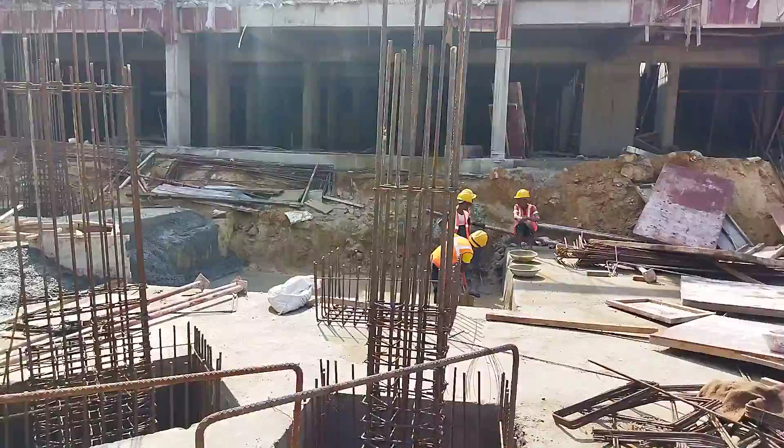Hi guys, the area we have shown is a clubhouse, and now we are going to explain about combined footing reinforcement as per the drawing. Meet Shiva Shankar, senior site engineer of this area. Now he will talk about the drawing.

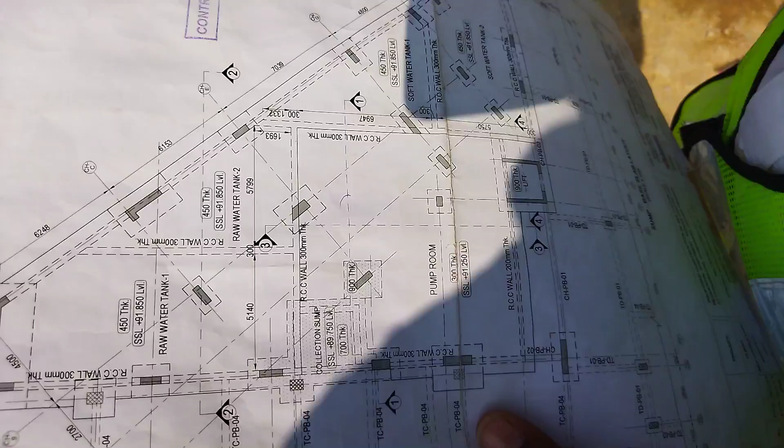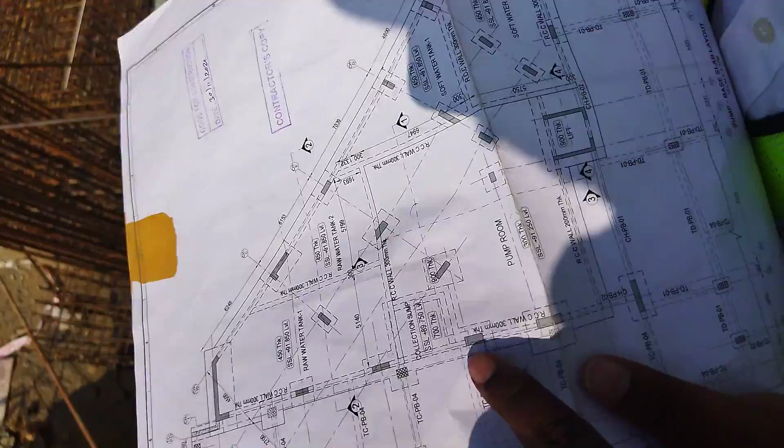The drawing which we are seeing in the video is called a pump room. This part is a collection sump, and now we are doing the reinforcement of the collection sump. Now we are going to open the reinforcement details and the section. See here, section 1. In this detail, it is section 1. So now we are opening section 1 of this drawing, another drawing.

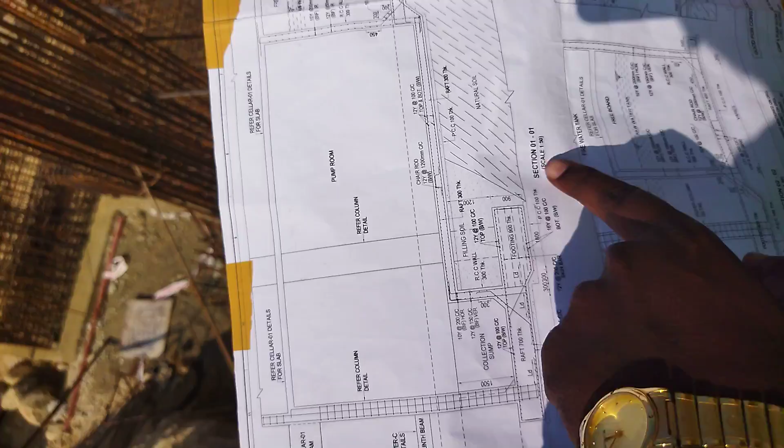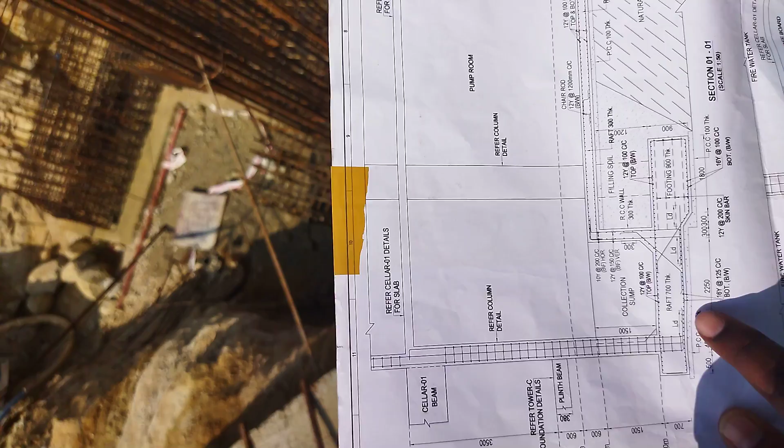Here it is section 1-1. In section 1-1, we are getting an RCC wall and collection sump, then the raft. The raft thickness is 700, and the reinforcement details. Now we are getting the reinforcement details. Here the top is 12 mm dia, and the bottom also 16 mm dia with 125 center to center.

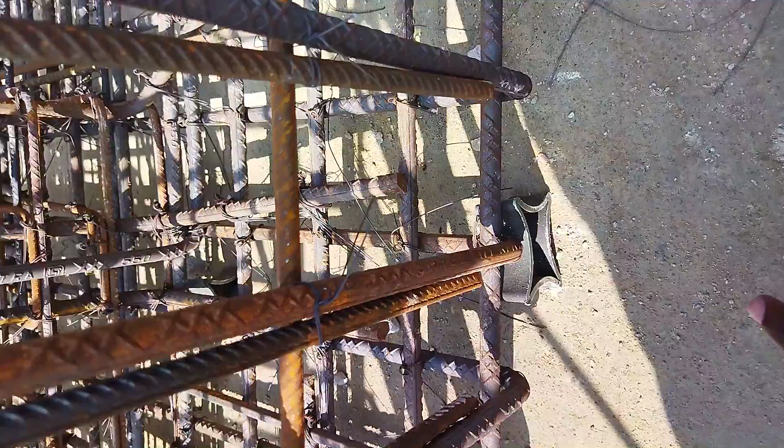Now we will see on the site whether they made it as per the drawing or not. See, this is a combined footing of a collection tank. Now we will get the details of the steel. Here we have placed the cover block of 50 mm.

As per the drawing, bottom mat is 16 mm dia, and the main bar also, it is a main bar, and the distribution bar is also 16 mm dia. Then we have placed a chair. Here it is called a chair. Okay, then top mat. This area is called the bottom mat.

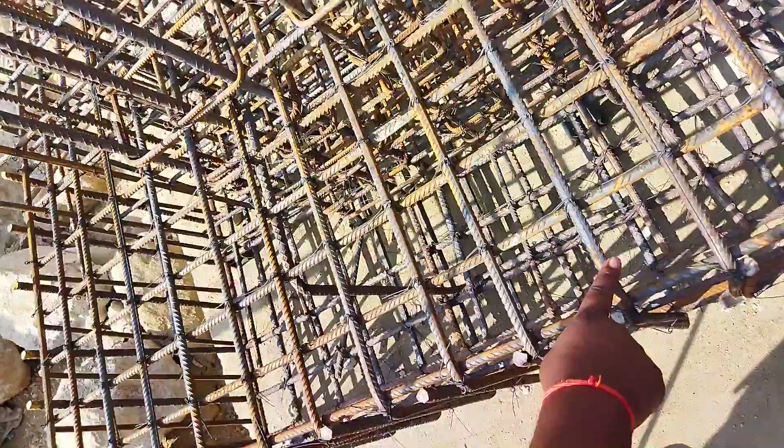As per the drawing, the top mat is 12 mm dia at 100 mm center to center. Main bar and distribution bar, both are 12 mm dia. This is a distribution bar, and this is a main bar.

And in this we get the column. In total we have 4 columns, 1, 2, 3, and here 4. Now we are going to come to this footing. This is all a combined footing. In this footing we will get the column details as per the drawing.

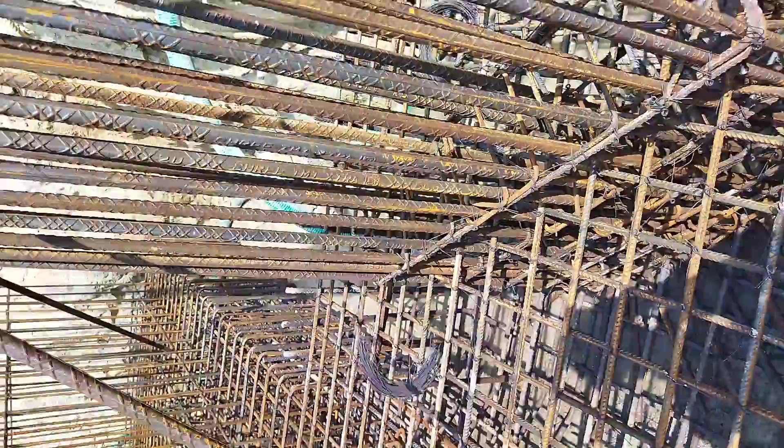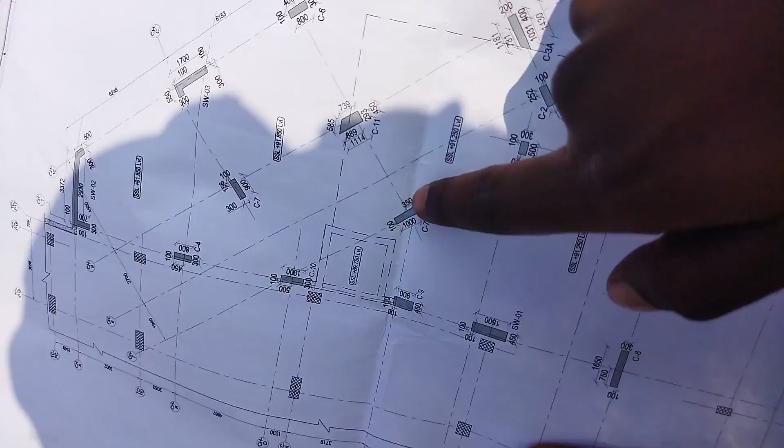Just open the column details. Here we are seeing the column which is shown in the drawing as C7A, and the grid is CH, E and CH7. So we are going to get the details in another drawing, in column details.

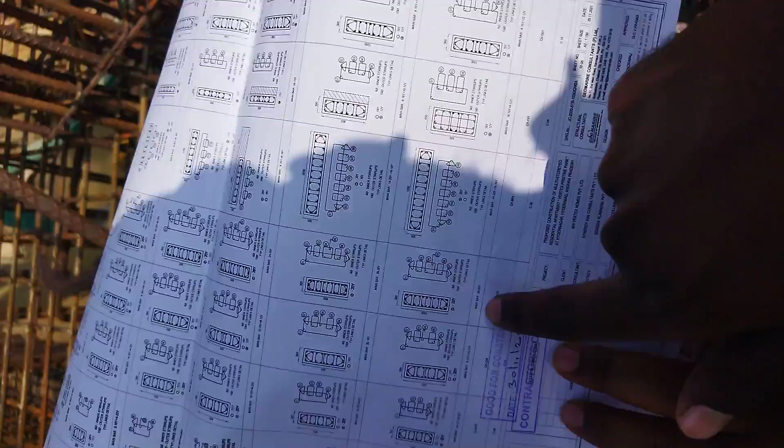Yeah, this is about C7A. As per the drawing, there are 28 numbers of 20 mm dia vertical bars. See, 1, 2, 3, 4, 5, 6, 7, 8, 9, 10, 11, 12, 13. 13 into 2 sides means there are 26, and in the center 1. Here 1 and here 1. So there are a total number of 28 verticals.

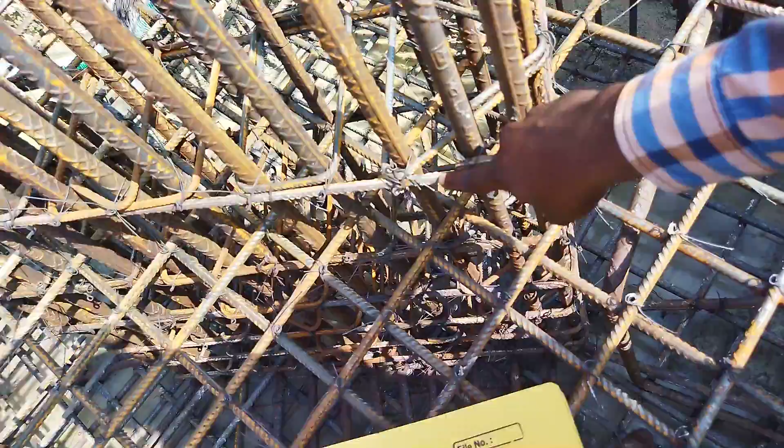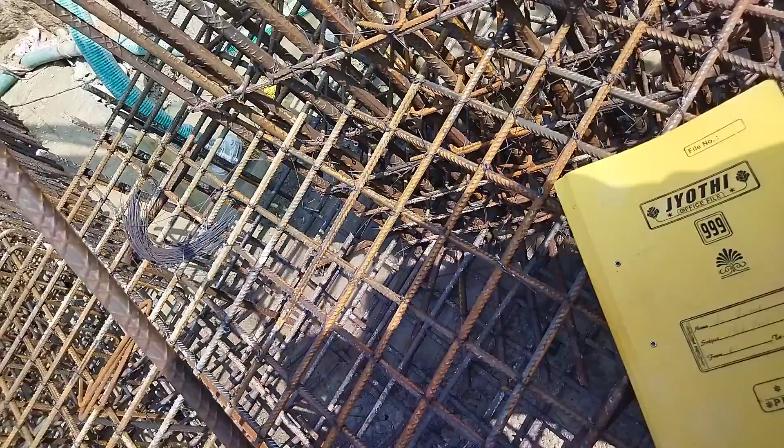Coming towards the stirrup details, as per the drawing, number 1 outer stirrup is 10 mm. See, this is the outer stirrup, 10 mm dia. And coming towards the inner stirrups, which are rectangular in shape, number 2, this is rectangular in shape, connected to 3 bars. See, 1, 2, and 3. Each stirrup is connected to 3 bars as per the drawing.

The second one and third one are square type stirrups connected to 4 bars. Total means... this is a rectangular shape stirrup connected to 2 bars. And the fourth one is a hook. Here a hook is missing, we have noticed one thing. Here one hook is missing. No, they did it, but this direction should be the opposite side.

And the fifth one is a hook. The sixth one is a rectangular stirrup connected to 2 bars. And the seventh one is a triangular stirrup connected to 3 bars. This is a triangular stirrup connected to 3 bars.

Here the same details in this footing: there is 16 mm dia bottom mat and the top mat is about 12 mm dia. Both the main and distribution bars of the bottom mat are 16 mm dia and the top mat is about 12 mm dia. The reinforcement work is in progress. After that we will do the shuttering and then pour M30 grade concrete.